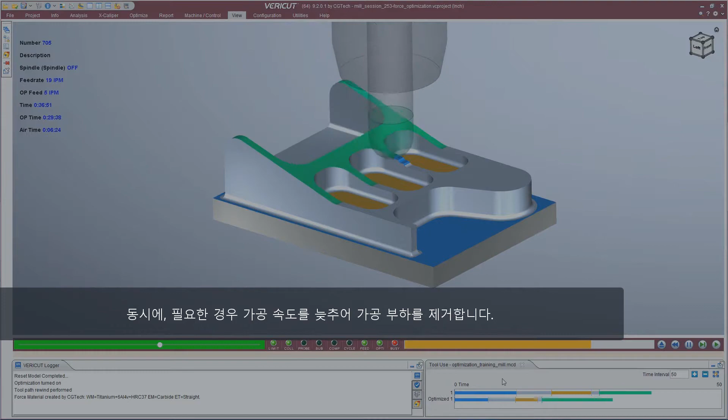Today we're going to be looking at VERICUT's force optimization. Force is physics-based optimization that recalculates feed rates and subdivides motions in order to maintain a constant ideal chip thickness for machining as much as possible. And simultaneously, when needed, it will reduce feed rates in order to avoid excessive cutting forces and spindle loads.

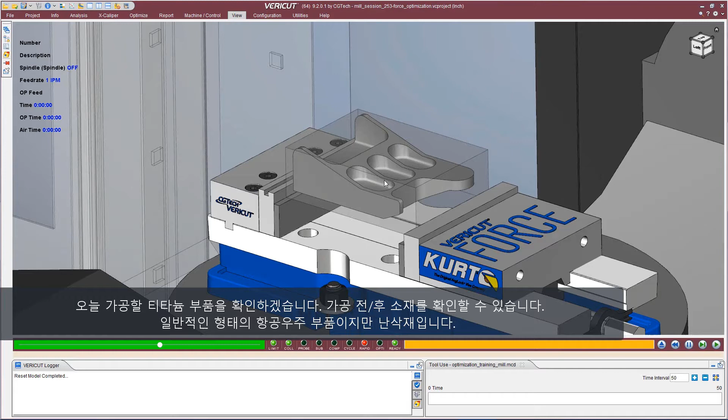Let's take a look at the part we'll be machining today. This is a titanium piece of material. We can see the part inside, so we can see what we'll be creating. It has very typical aerospace geometry. It's a titanium part, so not the easiest to machine. To focus on the machining, we'll use VERICUT's workpiece view.

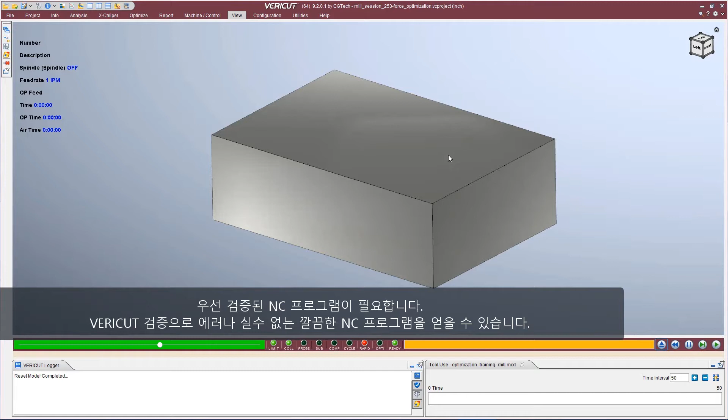VERICUT Force needs three things in order to be successful for you. First, it needs you to verify that the part you're machining has a good, clean NC program with no mistakes or errors. We've already done that in this VERICUT session. Second, it needs intelligence about the machining tools and what they're capable of machining.

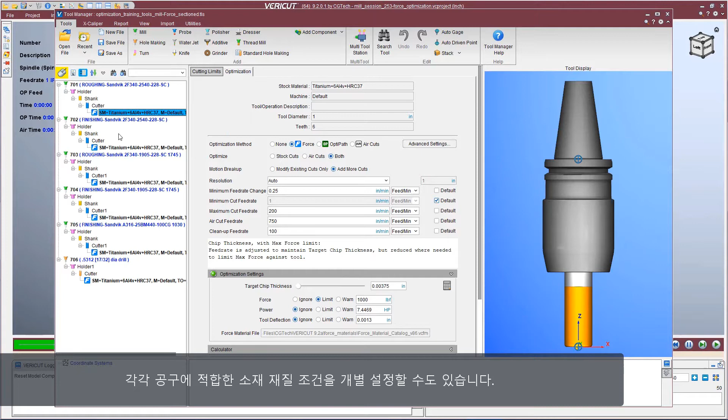So if we look at VERICUT's tool library, we'll notice it has stock material records, and these records are defined for use in titanium metal. You can have any number of stock material records under any cutter, and each one is unique to that cutter. So you can have roughing versus finishing, and of course different shape end mills as well. I'll show you a little bit more about these later.

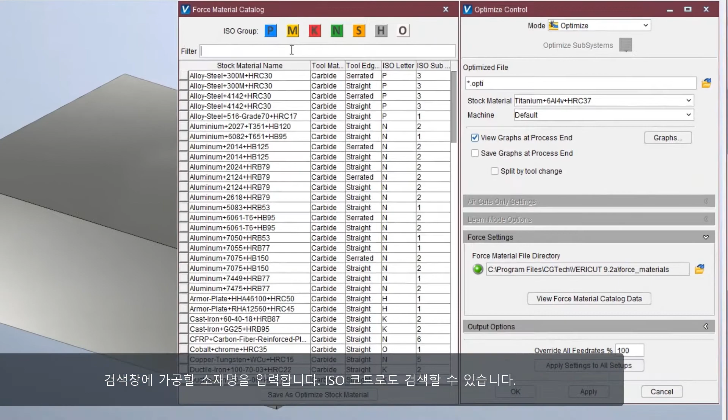The third thing VERICUT needs is it needs to know what type of material it is you're actually cutting. You do this in VERICUT's Optimize control window. When we go to optimize the NC program, since we're using force technology, we'll go to the force material catalog, and we'll want to search for the titanium material that we're looking to machine. As we key in the filter, VERICUT filters down the list to show us various grades of titanium.

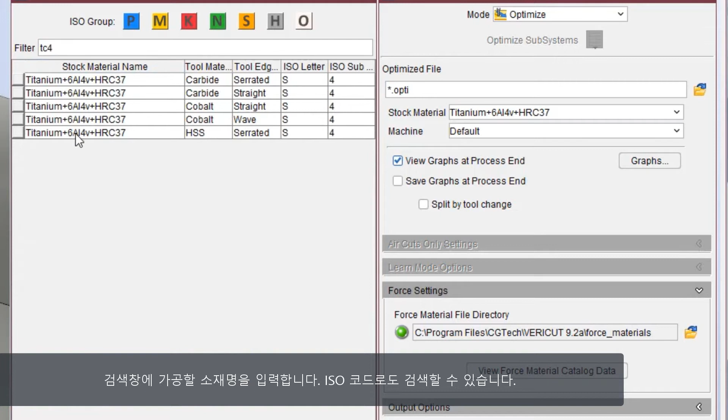You can also use alias names for material. So if titanium isn't a name that's familiar for you, and maybe you're familiar with something like TC4, you can filter in by that name as well, or by these ISO code groups, whichever is easiest. When you see the material that you want, you can right-click on it and send it to the Optimize control window, and boom, it ends up over here. You also have that same option at the bottom of the window. We're now ready to optimize.

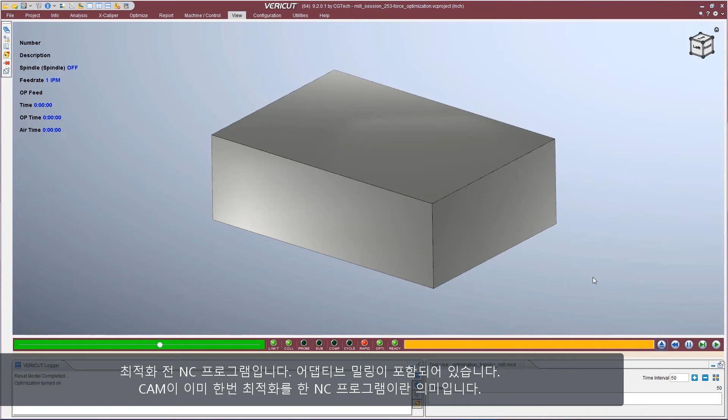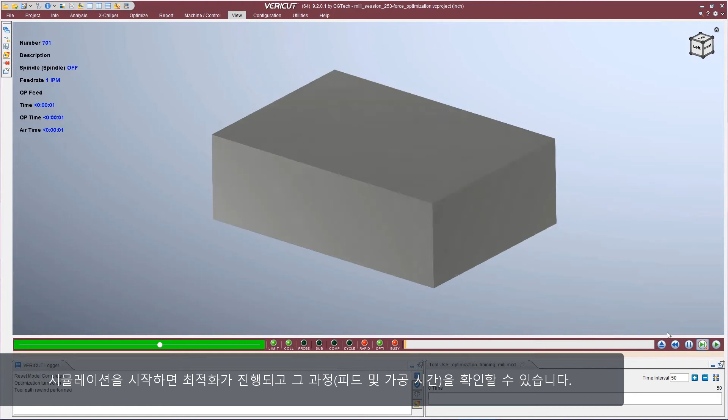Here's the NC program that VERICUT will be simulating. As you can see by the notes inside, this program contains adaptive milling motion, which is CAM optimized NC motion. We'll be seeing what Force can do with that. As we start the simulation, optimizing is taking place, and we'll be able to see what VERICUT does with this motion as far as feed rates and machine time.

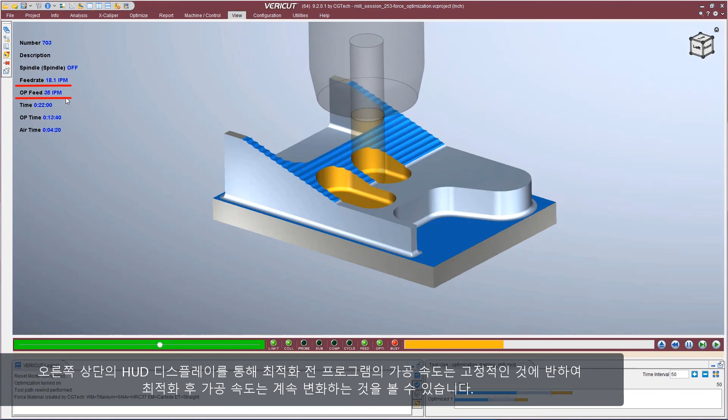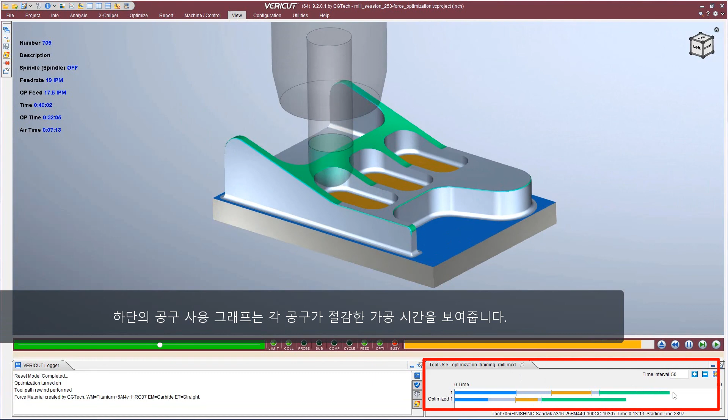Up in the upper left corner, I have the heads-up display configured to show us the program feed rate, which you can see is rather motionless, and the optimized feed rate, which you can see there's a tremendous amount of activity going on over here. These are the different feed rates that Force is calculating for us and outputting to a new optimized NC program. The machine time, and then the optimized machine time, where you can see the difference. Down in the lower right corner, I'm using the tool use graphs to show the difference between the original NC program and the optimized NC program.